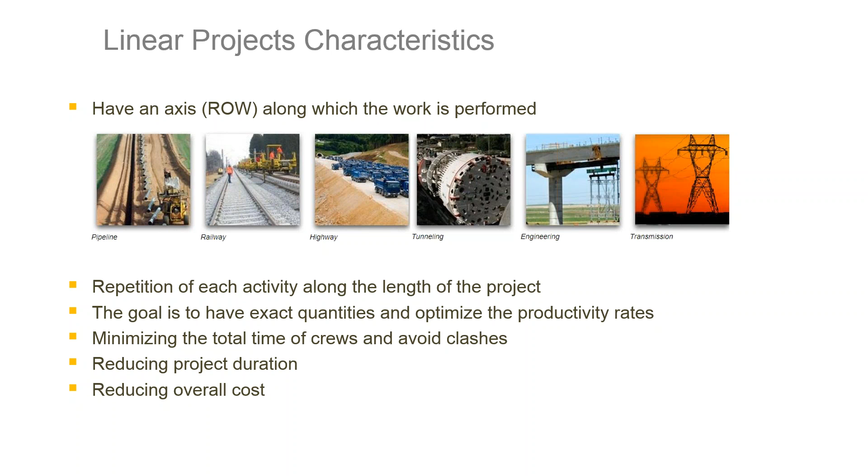Usage of linear planning in the project stage starts very early, because TILOS requires minimum project details to be able to start planning. Many of our customers use TILOS at a very early project stage in feasibility studies, and starting from the tender and bidding for estimation of time, estimation of effort, and estimation of project cost, also calculated in TILOS.

So TILOS helps many of our customers prepare a tender plan, which helps them develop their offer strategy, and this way they can build a healthy strategy of pricing, capacity, and crew management at a very early stage of the bidding. Of course, when the contract is awarded, the contractor can develop the detailed schedule, and later on manage their crews and compare the project against the baseline and contract performance.

Infrastructure projects are very complex projects. Changes happen very often. That's why TILOS also gives people a dynamic way of live project planning, because with any change you can easily measure the changes, and TILOS can also be used for variation order impact, delay analysis impact, and claim analysis impact, so we have full support during 100% of the project cycle, including maintenance and operation.

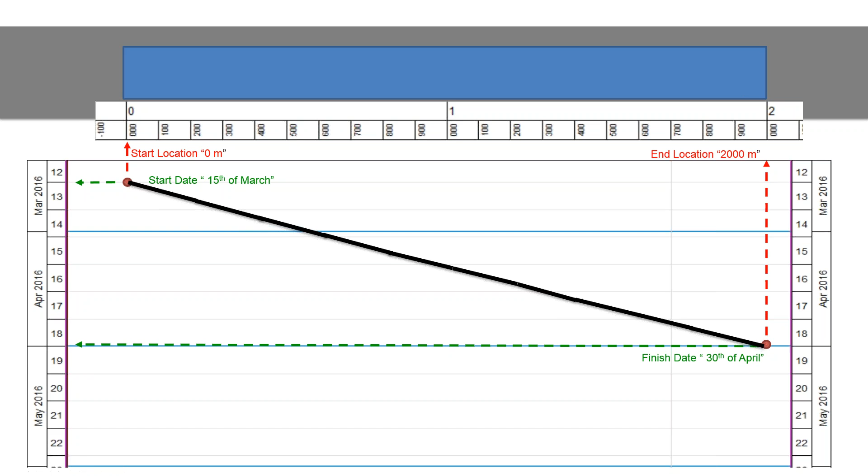If I go to the left, it represents my end date, so this is the 30th of April, and the difference between end date and start date gives me the duration, so this is approximately 46 days for the construction work moving the earth from 0 till 2,000 meters.

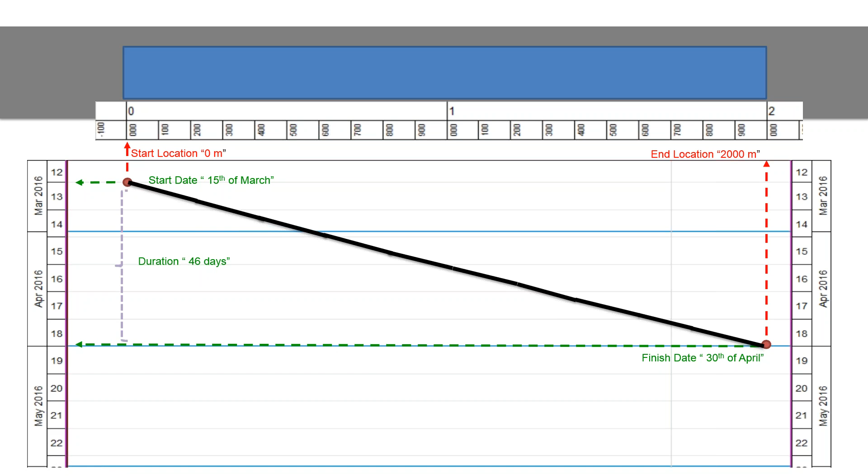Of course, I have here one piece of information, which is that average productivity is 21 meters per day, which is how I'm progressing. In a more accurate way, it's showing average productivity is 10,870 cubic meters per day, if you just divide 500,000 cubic meters by 46 days.

Of course, we can also divide this by working hours, and we can go to work rates per hour, per day, per month, per week, or per shift, so this depends how detailed you would like to control it. And if you go to work rate, it will also help you to measure the number of resources we need to be able to achieve this progress. Of course, this is a simple explanation.

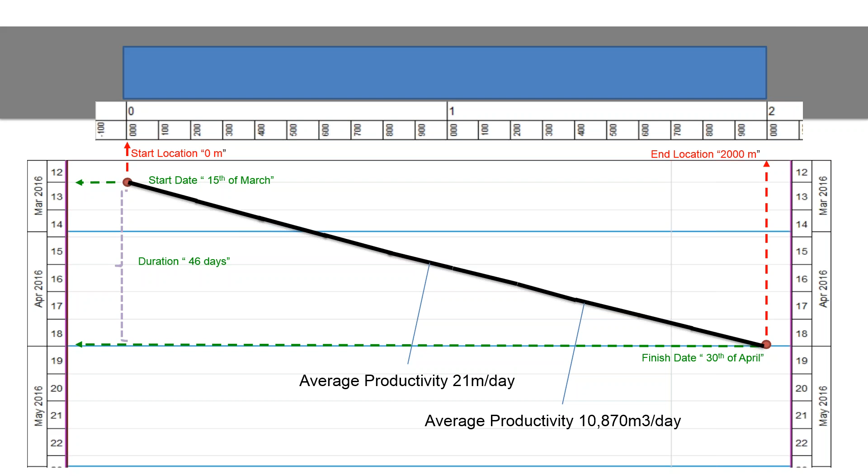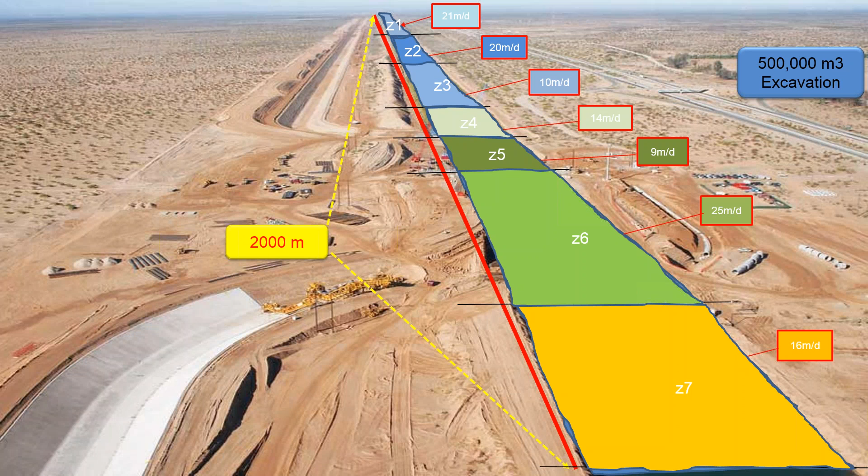I just want to make it a bit complicated because in construction, as you know, there are outside factors which always impact our productivity for the construction. And that's why I make it 7 different zones, and in each zone I would like to mention there is a different type of soil.

For excavation works, it's not very sensitively impacted in that kind of short area, but I just want to show that each area has different types of soil, and for each different soil we have know-how, an estimated average productivity, which is that in zone 1 our planned aim for excavation is 21 meters per day.

Zone 2 is 20 meters per day, and zone 3 is 10 meters per day because we have a difficult area here, and here 14 meters, 9 meters, which is the most difficult area because probably we have some rocks or some water area there, and we need to work a little bit slower here. Each color represents a different productivity rate.

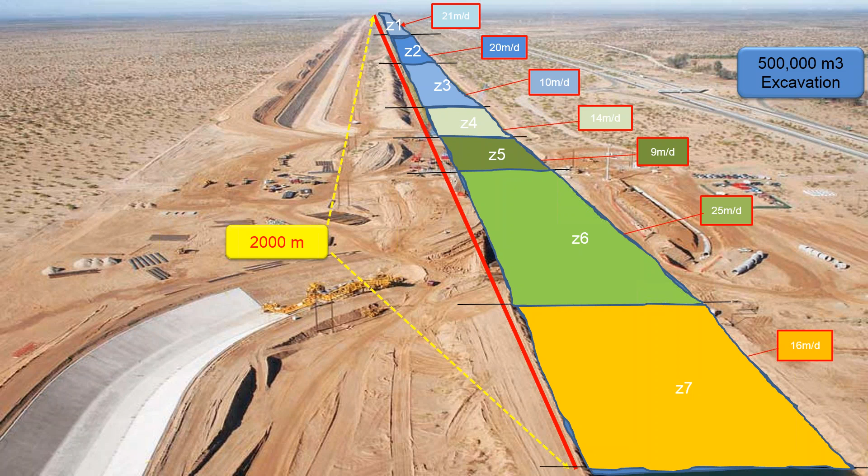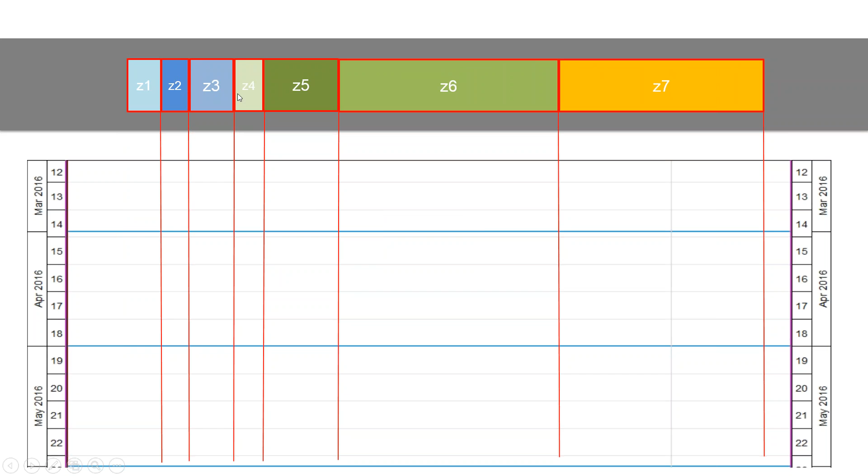As I said, you can also go to other work rates, cubic meters per hour, etc., so that you can also measure with different criteria. I want to be simple, and how to get this in the TILOS format: as you remember, 2,000 meters, here I represent each color as a different zone, so the first one is 21 meters per day. The second one, you can see the start and end, is 20 meters per day.

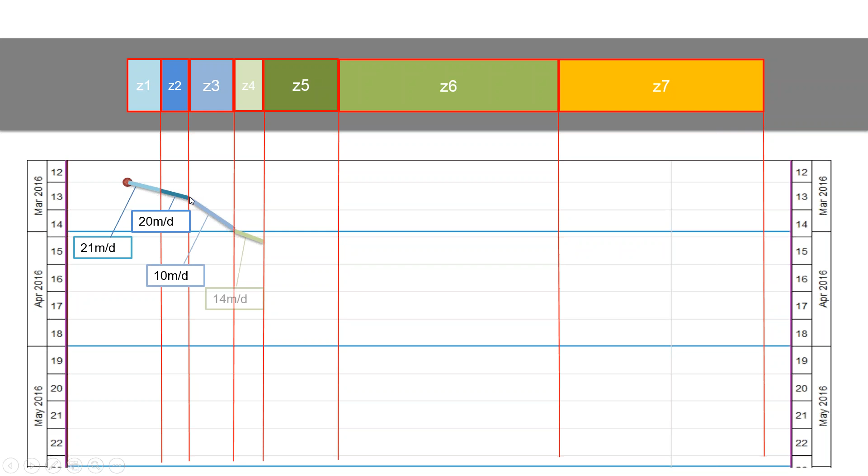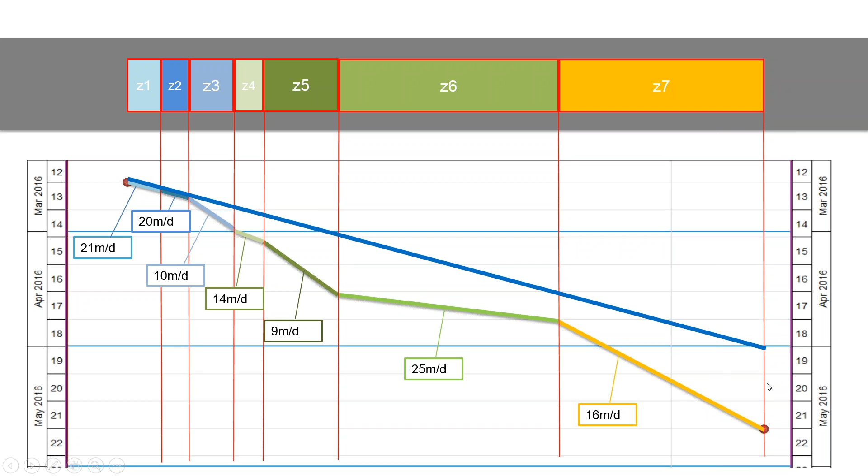You can see I am just entering the rates, and this shows me that if I have different productivity in each type of soil, my project is going to be finished like this. What was my target line? Let's say it was linear, and if you look at it here, this is the area of the delay, which is 21 days. It means in the very early tender phase,

I estimated 21 meters per day, and after that my project starts, and I measured the project actuals, and it shows me that because of one factor which we did not assume when we were bidding, the soil types impacted my project performance. And this is the 21 days. How can we avoid it?

I mean, sometimes it's already too late because we cannot predict delays. But if your goal is not having any project delay, there are a few ways. One is just increasing the performance. No one has magic for it, even if you use the best software. The best software will just give you projection and estimation. One of the easy ways, let's say a must, is just increasing working hours.

Of course, I always believe in motivation. Motivation means motivating the people to work more efficiently; this is another subject which we presented about Parkinson's law and aggressive scheduling, aggressive management, but there is also a limit to it. And how to increase the performance? One of the methods: you can increase working hours, so instead of working 12 or 10 hours, you can increase to 16 hours or even 24 hours of working, which we've seen many times.

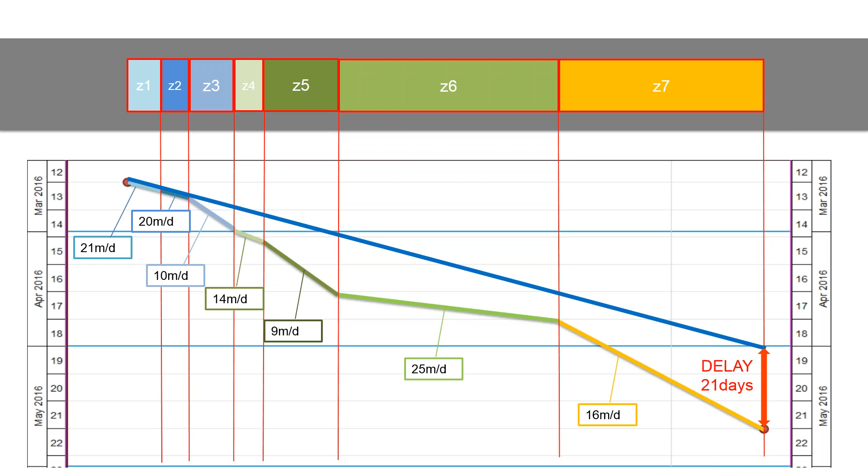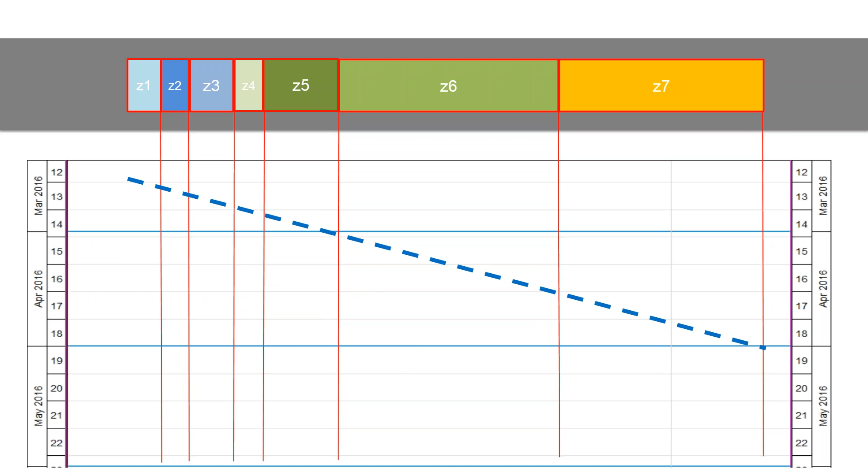But sometimes we have no luxury and no choice, so here let me show you how we increase from one crew. This is one crew, so we decided let's move the second crew. This is our target line, which we agreed with our customer for the finish date and start date, and we have just registered with crew 1 started, and everything is going well, and it's great. But after that we just realized,

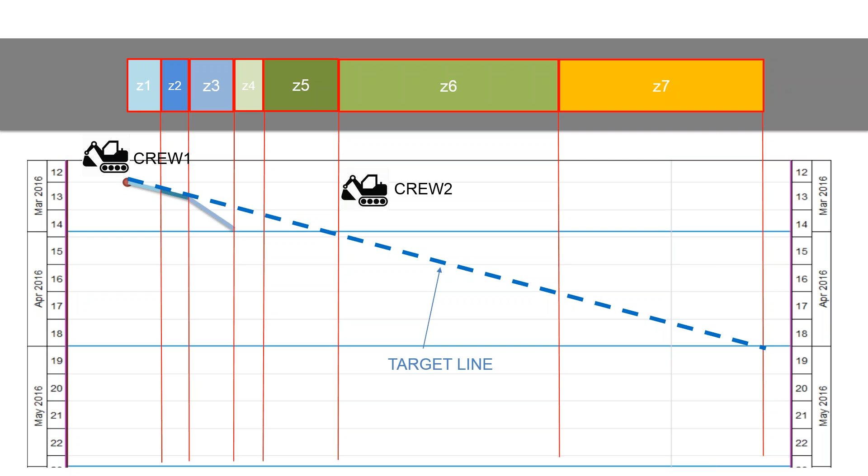okay, we are also going good in this second zone, but we just realized that our progress is dropping down, which will cause us a project delay. So we just decided to put a second crew and start it here. At the same time, crew 1 is continuing, and this way we can avoid delays.

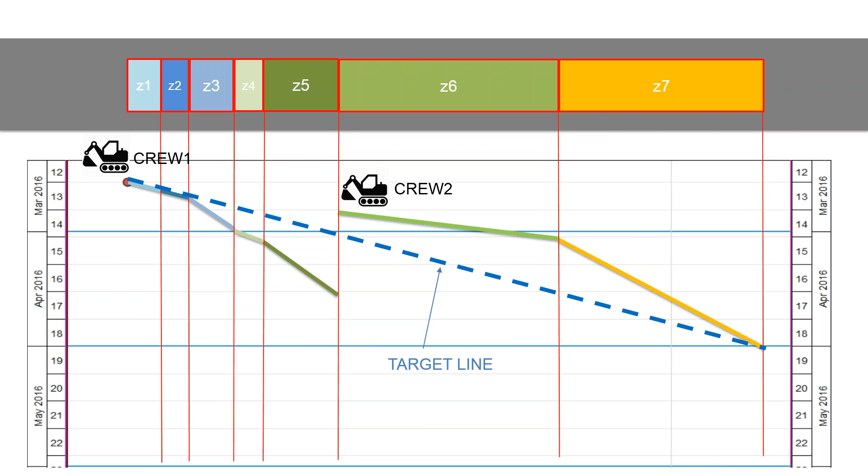But as I mentioned, a second crew means extra money, and this is the area which is 21 days. Just by assigning the second crew, we avoid project delay in terms of time, but we increase our cost because we have an extra resource which we are using. And in the end, as you see, we have achieved our channel and the water in the channel, so this is how we are approaching and managing the projects.

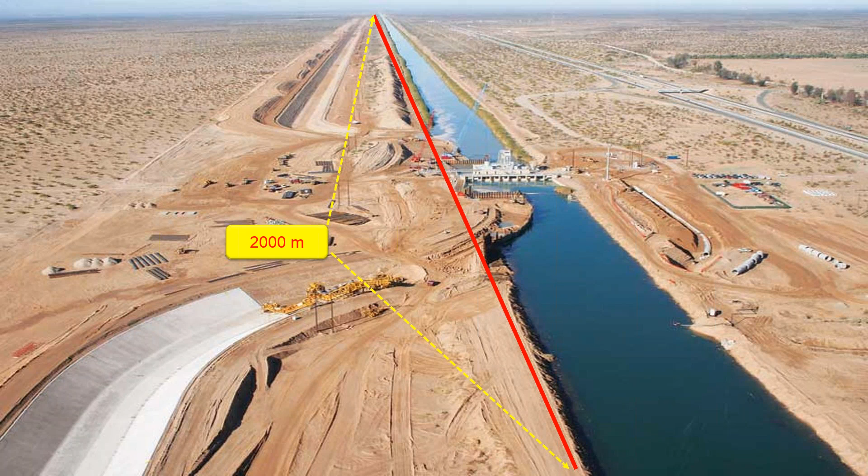Today I chose the channel project because in many examples we were using highway, railway, and I just want to mention that TILOS can be used for any project which is linear. And as you see, this project is also linear, and I would like to just use this example. And what is the goal? I mean, why do people use TILOS? Because first of all, the extra dimension.

So today I will show you one progress method which will help you understand all your cost, time, location, resource, units, and percent complete, so it will be very simple, but at the same time give what you need. What I want to mention, of course, is we also have extra factors, such as weather. Weather directly impacts our project performance.

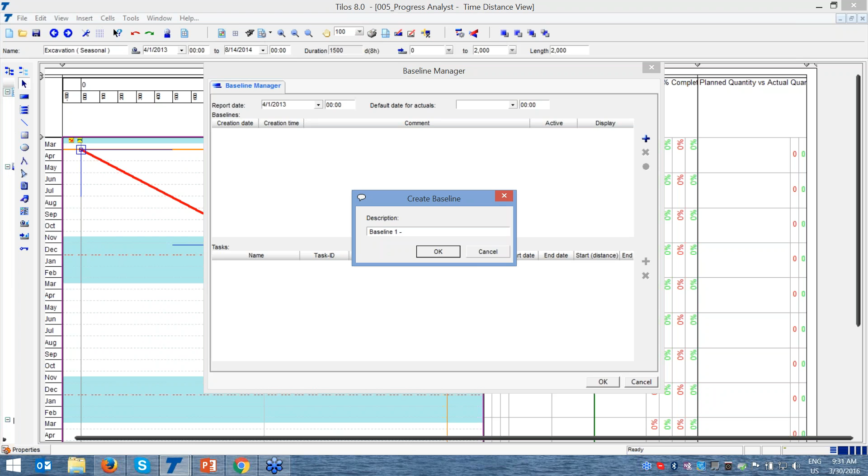This is just my simple progress entry. Start date is 1st of April, end date is 14th of June. This is around 1,500 days, working 8 hours per day. And what I am doing now, I just set up the project baseline, which is the target line. We go to project baseline and set up the project baseline. And I'm calling this baseline 1, which is when we have signed contracts with our customer.

When I create this, you can see here I have 2 lines. The black line represents my project target, the baseline. The red line represents my forecasting line. So I just want to make it budgeted cost, because it was forecasted cost, and budgeted progress and budgeted quantity. I just press F5 for calculations, and please see here now budgeted and forecasted cost is the same, 915,000 euro for the first quarter, 1,380,000 for the second quarter. So that's my project budget cost on a quarterly basis.

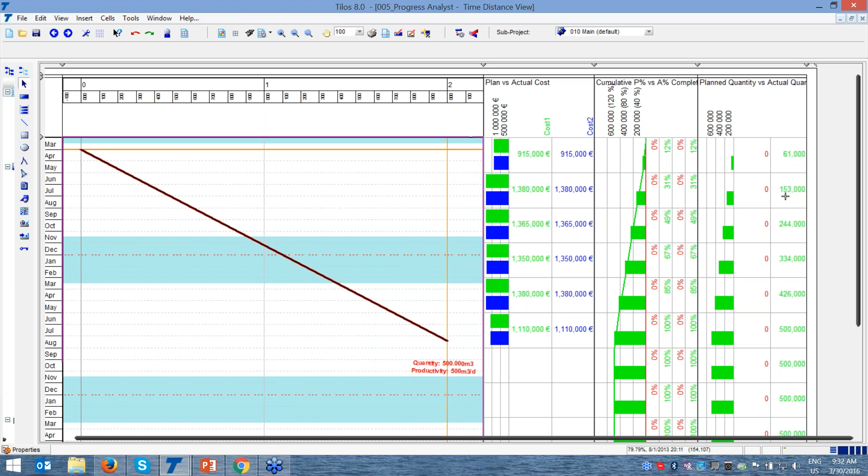The same for budgeted progress, which is 12% in Q1, 31 in Q2, 49 in Q3, and 67 for Q4. So you can see that the green line represents my planned progress. Here there's also important information: in Q1 our aim is having 61,000 cubic meters of excavation. This is cumulative. By the end of Q2 we aim to have 153,000 cubic meters of excavation.

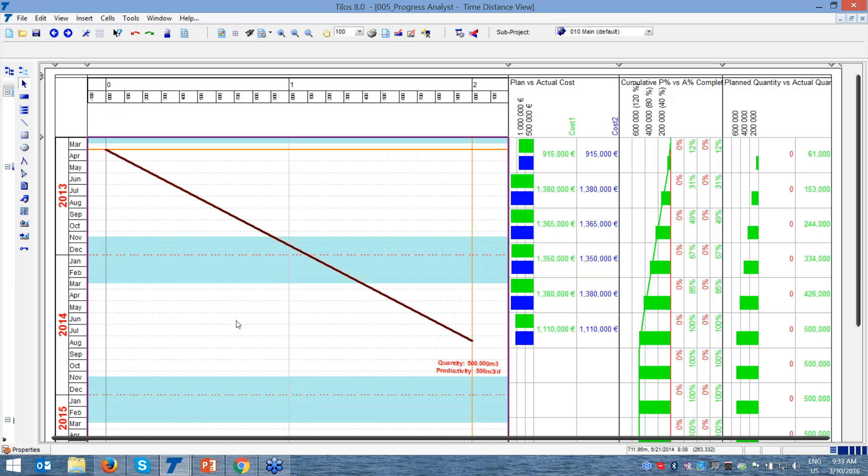Now it's time for us to enter the progress. Let's say that our project started and 3 months later we want to measure it. Generally we recommend that the optimum for measurements and project analysis is twice a month or once a week. If you use Trimble technology today, you can even measure it on an hourly basis, because Trimble gives the opportunity for GPS controlling, and this way you can easily measure it. We also recommend you look at this technology, but let's just enter the progress 3 months later here manually.

And one of the best working methods, in my opinion, for entering progress in TILOS is that I always use the distance base, because as I mentioned, if I measure a proper quantity in each area, when I enter that this area has been completed, I can easily track the quantities. Let's go and enter the progress. Let's say we started 1st of April, and we have May, June, July, and August. 1st of August, where should I be?

I selected 1st of August, and the system provides me the target point. It is telling me that it was planned to start from 0 and planned to finish at 488 meters. I speak with my people, or I just measure it. Let's say we didn't achieve 488, but only 400. It means that we are 88 meters behind our target. So I select OK. And please see, now we just created the schedule for this.

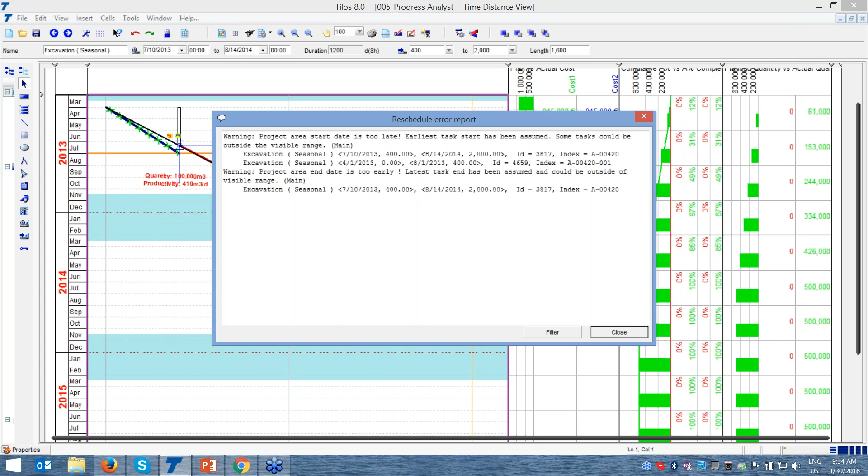The system provides me now this target line. This is the data date, 1st of August. The system is telling me that I have 100,000 cubic meters of actual quantity. My planned productivity was 500 cubic meters per day, but actual productivity is unfortunately 410 cubic meters per day. This line shows me that I'm going to have a 1 month delay because of that 410 actual productivity.

On the right side, I want to see the extra cost I'm going to spend, so I just press this. It tells me the extra budget which I need to be able to complete my project.

My target progress here was 12%, but unfortunately I achieved 10%. Same here, my target quantity was 61, but unfortunately I achieved 50,000. Because of that, I now have full control.

Plus, now with our project team, we can do a what-if analysis. First of all, is the 1 month delay real or not? I want to judge this, because if today, 1st of August, my team performed at 410, there is no guarantee that from today till the end of the project I'm going to achieve 500. So I just want to see the current performance projection - if I perform the same today, where will my project end.

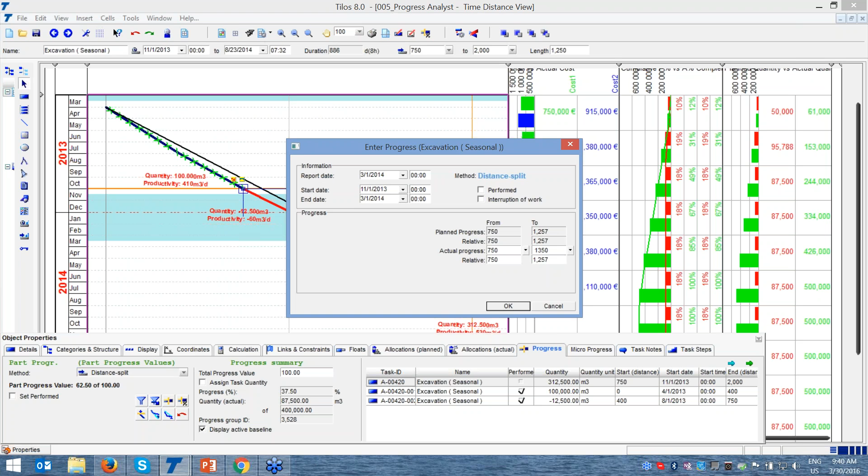We are really performing better than what we planned, and you can see the speed is changing. We schedule again, and it's showing now that we are going to finish earlier than what we planned.

We can even go here and select the estimated time for finishing, which tells us it's time to start cutting resources, because 500 cubic meters was our plan, and if we have even 490 cubic meters per day, we will be able to catch up to the project finish date.

So that's how you can enter the progress and measure it. But this is generally what we are doing. Do you have any questions about it?

By the way, you can type your question because I cannot hear you, but I can read it. Great, one question, very good. Actually, I was expecting this. How we can measure the number of resources which we need to increase or decrease? Great question, this is what I was waiting for, that's why I prepared myself.

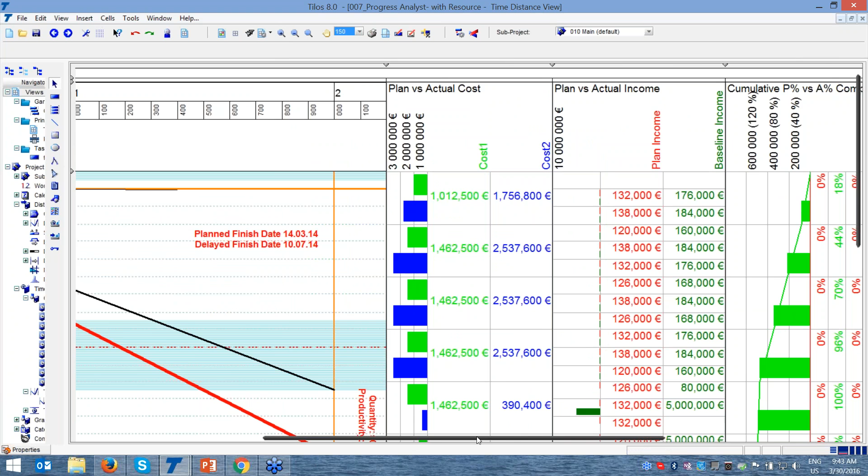Let's say this is a simple chart, and let's make it a bit more complicated. I prepared a more detailed one, which includes not only planned cost and actual cost, but also planned income and actual income, because my cash flow is impacted based on my performance. On the right side, I also included the number of resources - truck, machine operator, and excavator. It tells me I need 13 trucks, 3 machine operators, and 3 excavators. This is just the number of resources which I need to have in my project.

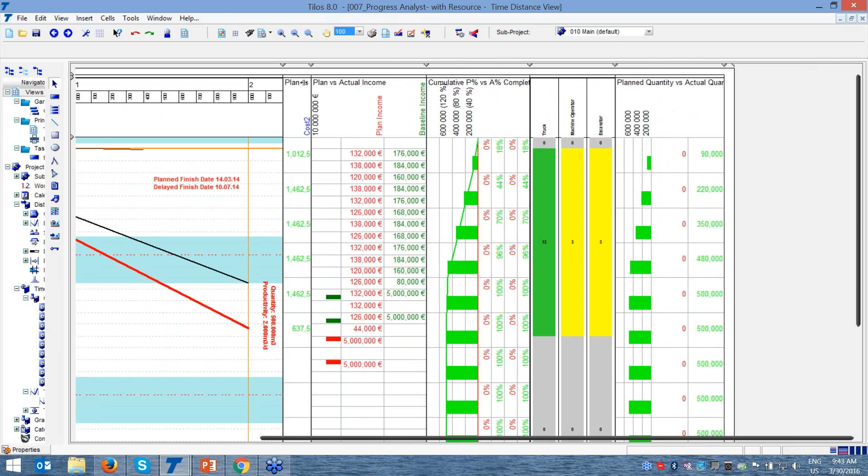Let's go and hide this cost and hide the income, and the same for progress, and just focus on the number of resources. So we have an activity planned finish date of 14th of March, but delayed finish is 10th of July, so we have around 4 months delay.

This is our planned productivity and this is what we're going to finish with. So what I'm doing now is increasing my productivity - let's say actual performance is 1,500, but planned performance was 2,000. If I type it here manually, or 2000, now you can see I catch up - planned finish date and delayed finish date are the same. There is no delay. And for me it's now very important how many resources I need to increase.

I just select F5 to recalculate. Please focus on the numbers here. The system immediately shows me that I need to increase 1 excavator and 4 trucks to be able to achieve this productivity with no project delays. Is there any question?

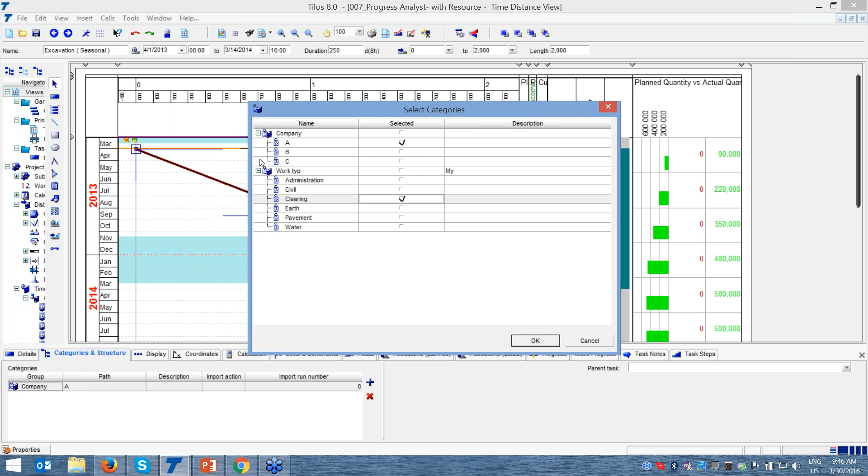Also, in each activity, we can assign an activity code, who is doing it, what type of work it is. It will help us for filtering and reporting purposes. And we have display options - each company and people can have their different type of representation for the progress, so you can also change the type of the activity. Coordinates, start location, end location - you can also change start location and end location. You can even split the activities.

We have calculation, so we are entering here the total quantity of excavation. By the way, we can calculate quantity using TILOS, or we can enter quantity inside TILOS and estimated duration or work rate. We have a very strong estimation engine, which means we can estimate the quantity, we can estimate work rate, durations, that kind of things. When you enter the planned work rate per day, you can also select the units - what is the unit, because I showed excavation activities, but we have other construction activities with different units, and average daily working 10 hours or 8 hours, that kind of things. And here we can also set up the manual or estimated cubic meter per day. When you enter the unit prices, the system also gives you the cash flow.

TILOS has links, which means you can create finish-to-finish, finish-to-start links between activities when you go to different types of activities, float analyzers and resources.

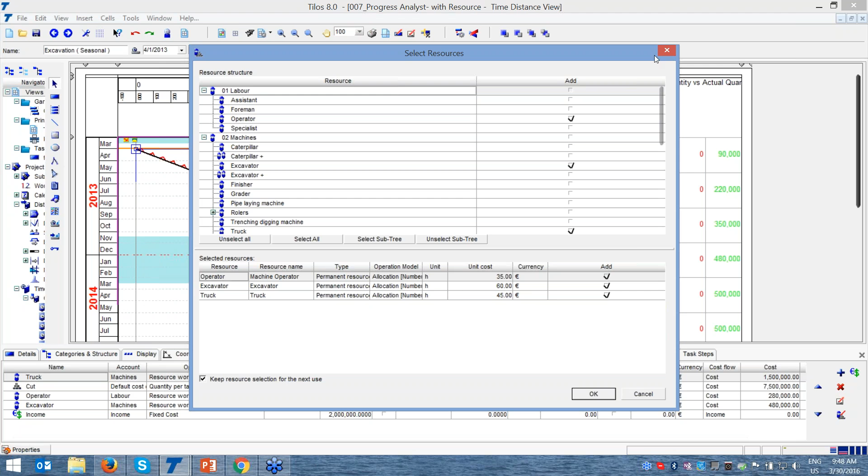We provide some sample resource lists, but you can create your own company resource list, adding new resources without any problem. Unlimited resources can be added, with the unit price, work rate, and estimation. If you are using Excel and have too many resources, we can help import them from Excel into resources as well.

We have one thing which, in my opinion, makes me a real fan of TILOS, also because I'm a Primavera implementation specialist. I've been implementing Primavera in many organizations. One of the issues we were having trouble with is that to be able to control the quantity and the cost with Primavera, you need to plan.

Using the same criteria is important of course, but in infrastructure projects it doesn't work, because sometimes during the tender phase we are unit-based, going like per kilometer or per meter cost, but when the project starts we want to make micro-based cost controlling for per soil quantities, very detailed ones. So even if your plan criteria is different than the actual criteria, you can make plan and actual comparison in TILOS. The progress, micro progress, these are some other areas where you can assign resources easily inside TILOS.

Another question: can we track cost and revenue simulation on the same activity basis?

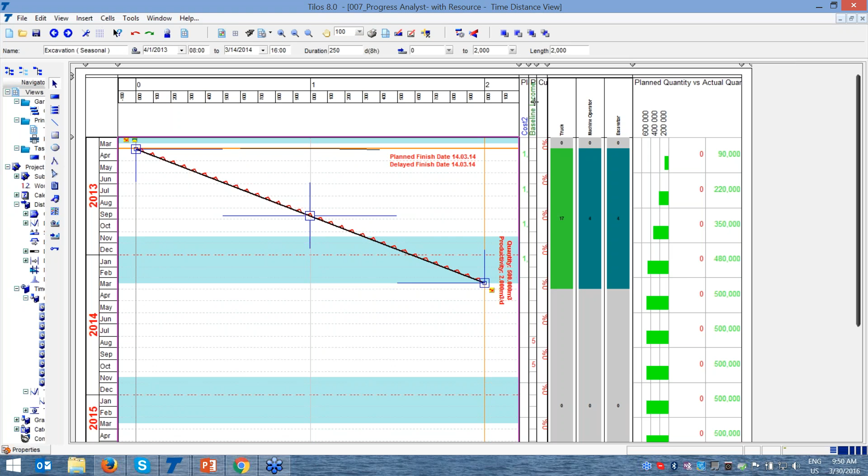Yes, because you can see this is my project cost and my project income, and this is just one activity, so in one activity I put cost and income criteria, and by this way I can create the project cash flow. But sometimes it can be different, because as I said, our project owner gives us income per kilometer or per meter, but our cost is per unit, so the criteria is not the same. We can assign income for the project, we can assign cost to activity, and by this way we can still get the project cash flow.

Okay, well, if you have any other questions.

The question: hi there, I am a P6 user, I would like to know about the option for TILOS schedule update for activities, retained logic, progress override, or actual dates in P6.

Well, we have full integration with P6, so when you go to the TILOS file, we can import and export the Primavera file. If you want to send the data back to Primavera, you can just send it, or we can open the Primavera file. The best practice is like this: we make the plan here, send it back to Primavera, detail it in Primavera, enter the progress in Primavera, then send the progress back to TILOS for better representation for reporting. Many of our customers are using Primavera and TILOS together, because we have integration in both systems.